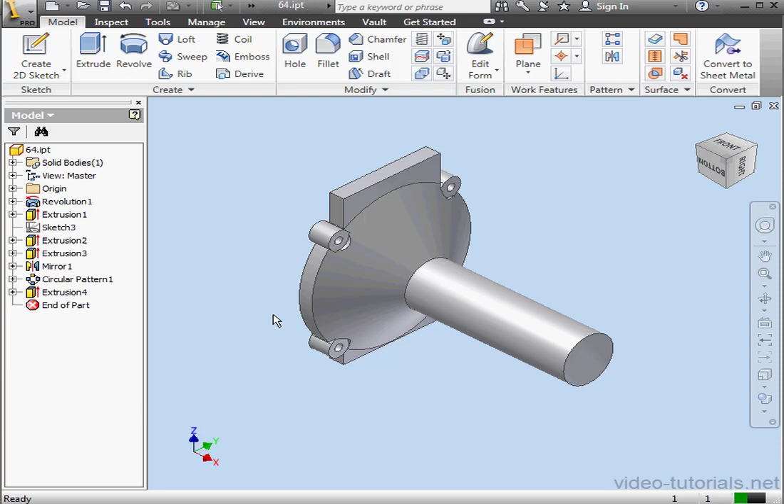Welcome back. This is our third lesson on creating the gear housing. In this lesson, we're going to build the full plate, the front part of the gear housing, and the top barrel housing. Okay, let's get to work.

First, hold down the Shift key on your keyboard and your middle mouse button or mouse wheel to rotate the model. Now let's right-click and insert a new sketch on this face.

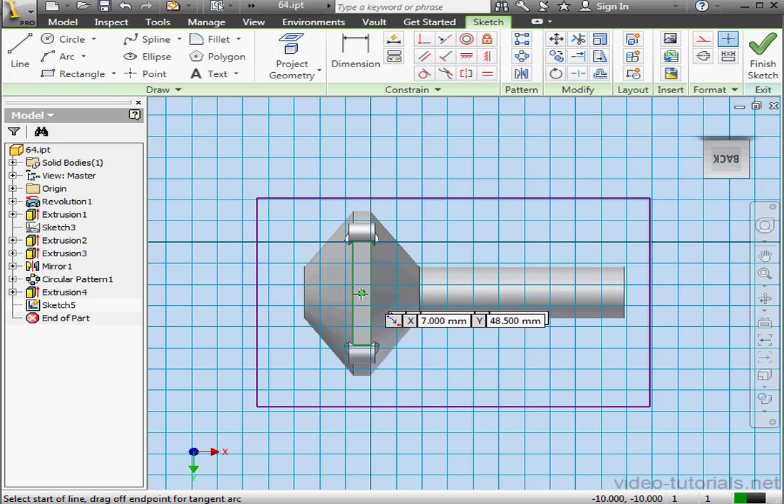I'm going to drop a rectangle here, something like this. Now activate the line command. Let's create a line from this point to this midpoint. Apply a horizontal relation.

Select the line. Apply the Project Geometry tool, and let's select this edge. Let's apply a collinear relation. We'll select this line and this line.

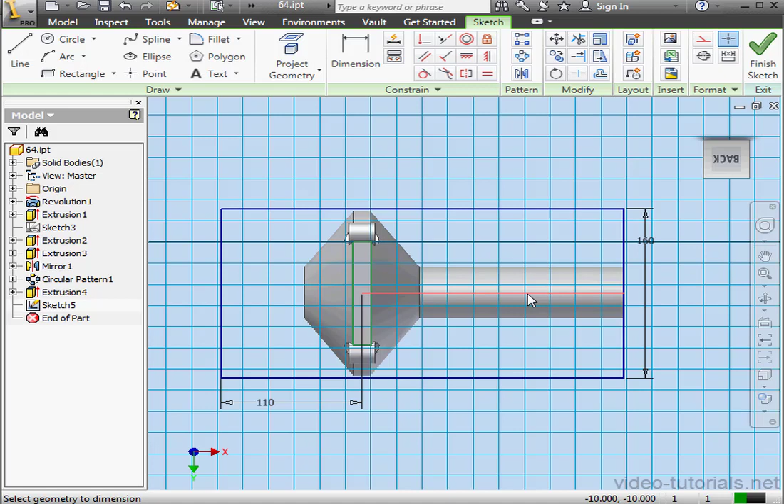Now some dimensions. This side will make 160 millimeters. And the distance between this point and this line, I will make 110 millimeters. Lastly, let's convert this line to construction geometry and finish the sketch.

Let's take an isometric view and activate the Extrude command. Select the profile to extrude. Let's change the direction of the extrusion. Make it 10 millimeters in depth. And OK. Let's insert a second sketch now on the XY plane.

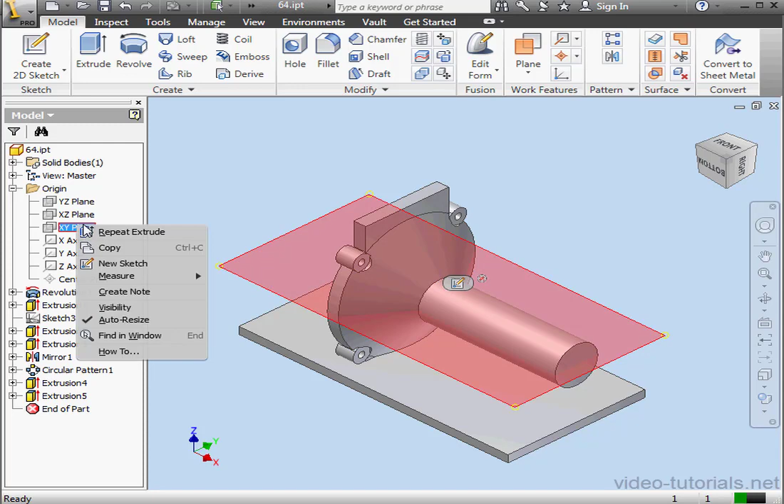Right-click, New Sketch. Let me just zoom in a bit. And let's go back to wireframe view, it's just easier to sketch that way. Activate Project Geometry. Let's project this edge.

Now activate the Rectangle tool, and let's drop a rectangle about here. Next, a 3-point arc. First point, second point. For the third point, I'll left-click when I see the tangency glyph. There we go. Press Escape to exit the tool, and let's delete this line.

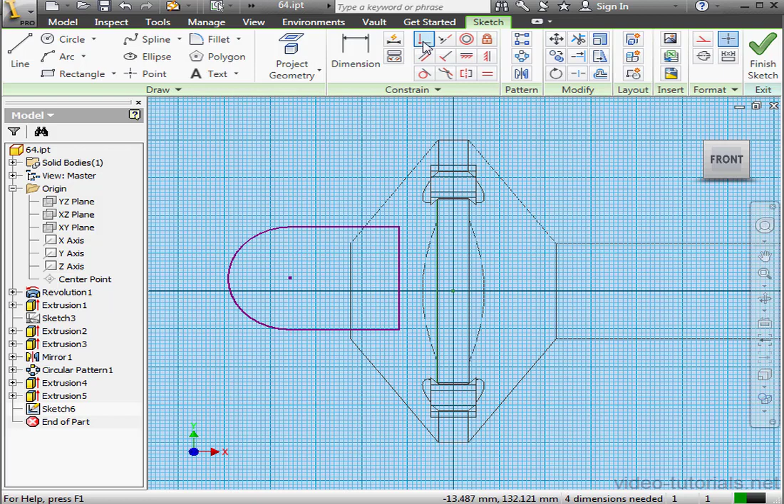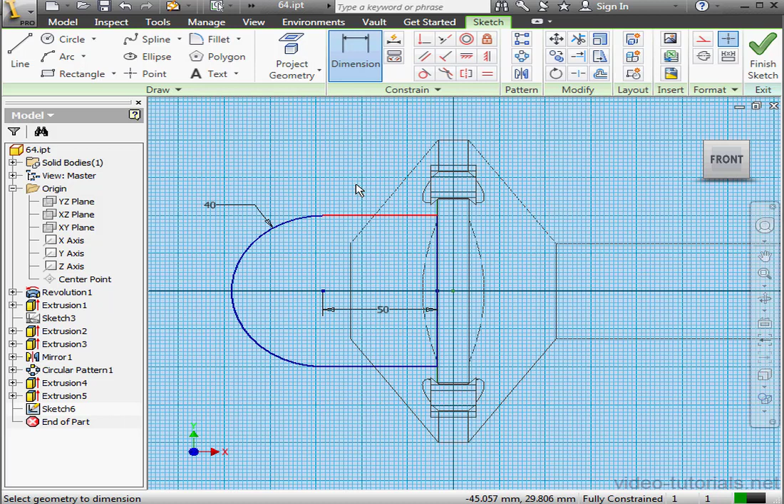Next, I'll place a coincident constraint between this point and this point. And let's apply dimensions between this point and this point. Let's say 50 millimeters, OK. Let's dimension the radius of this arc at 40 millimeters, OK. Our sketch is fully constrained, so let's click Finish Sketch.

Activate the Extrude command. Our profile is pre-selected. Let's just take a different view. It'll be a symmetric extrusion, 160 millimeters in depth. And let's click OK.

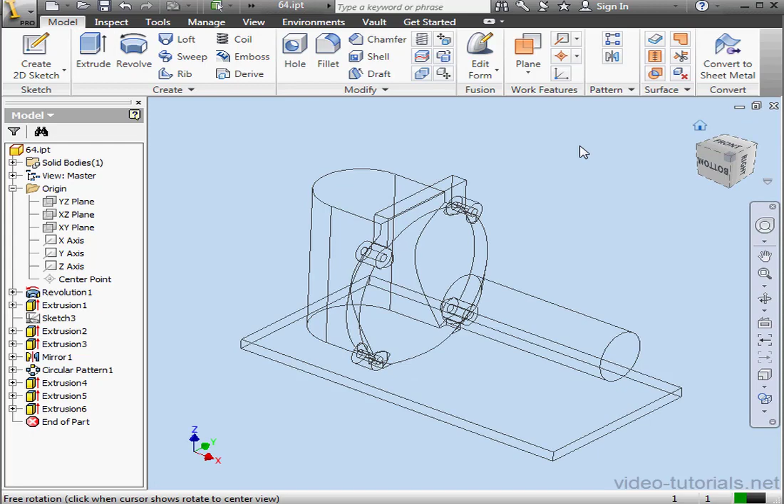Let's take an isometric view. Right-click on this face, New Sketch, and activate the Circle command. Right now we're creating the housing for the top barrel. Let's apply a dimension. We'll make this diameter 50 millimeters. OK.

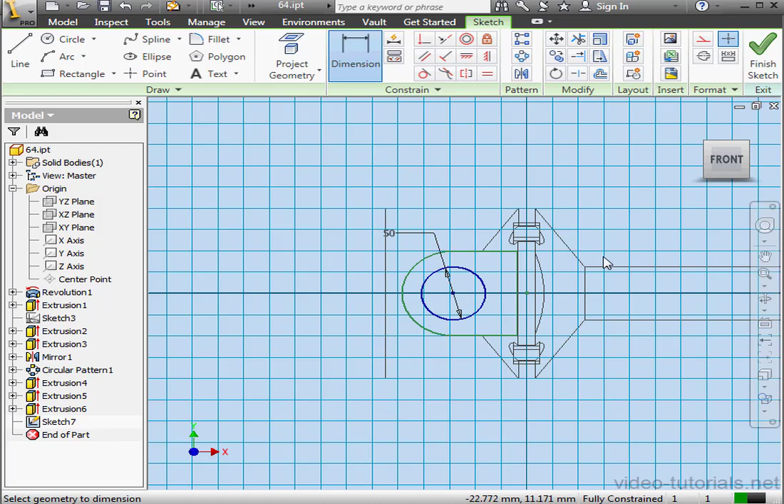Let's finish our sketch and activate the Extrude command. Select our profile, make it a 20 millimeter extrusion. Let's apply a taper on the More tab, -5 degrees, and let's click OK.

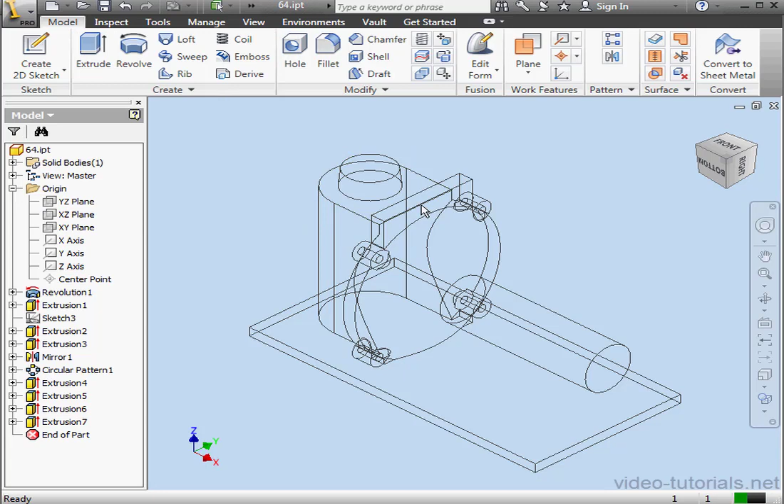All right, let's take a Shaded with Edges view so we can better see what we've done. And this concludes our third tutorial on the gear housing. Don't forget to save your work.